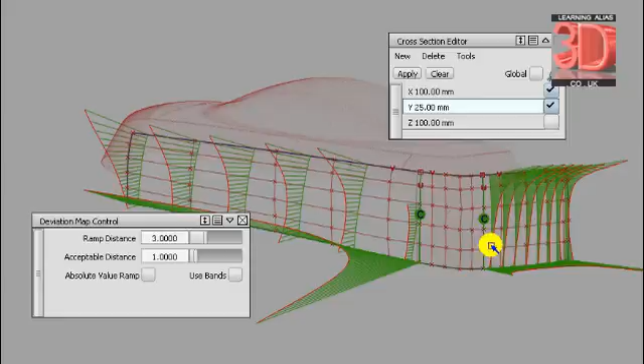We want to get this blend here looking very neat and being very close to the mesh, but the blend has to come after these surfaces 1 and 2, which are the parent surfaces. And as you can see, I've used a cross-section editor to find out what's happening all the way along this surface, and also I use a comb along here to show me what's happening to the surface.

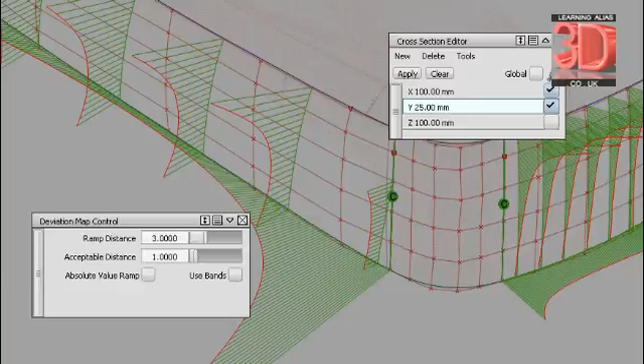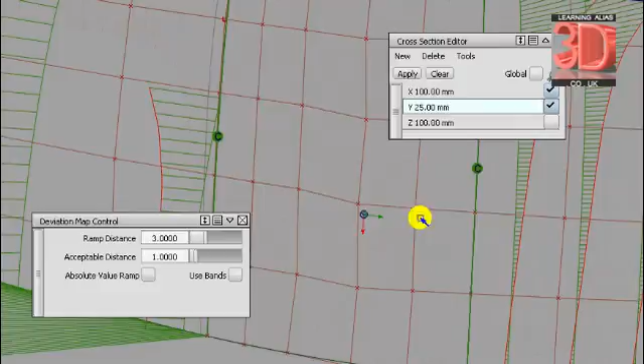Okay, now I've changed this surface to degree 5 so it matches the surface here, and that gives you a smoother flow in your hull around the blend eventually. Okay, there's a little bit of tidying up to be done along there.

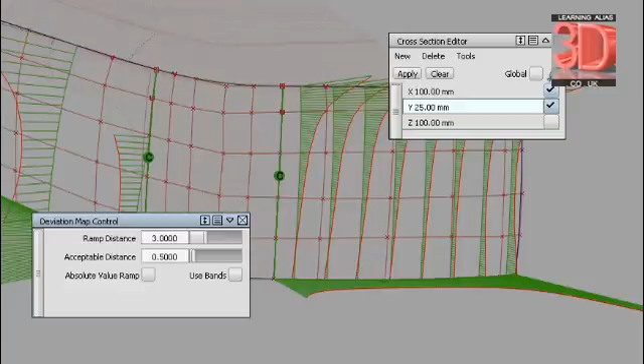Now, okay, let's do some evaluation. I'm not going to work to 1, I'm going to work to 0.5, and let's just have a look at what's going on there. And you can see that we're all looking good at 0.5 mesh tolerance. Okay, there's a little detail to sort out there, but generally speaking we're looking good. Okay,

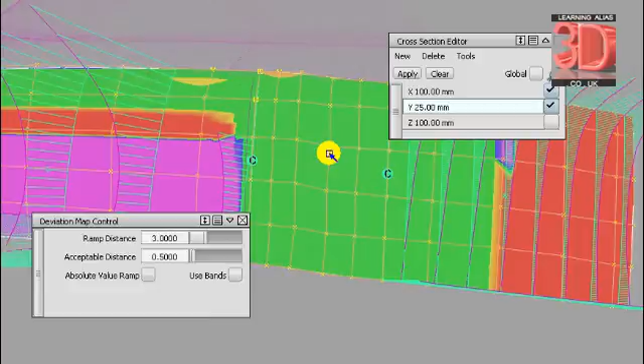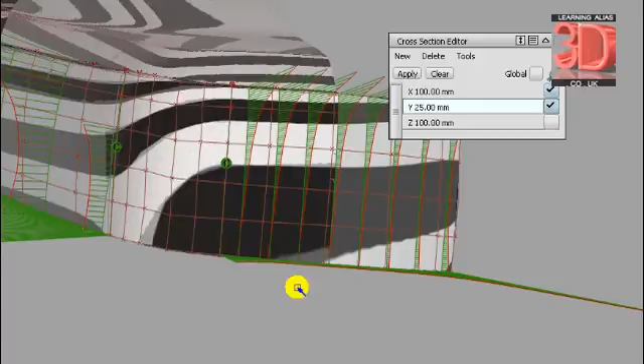next thing I want to do is take off the deviation map and put on the zebras with some transparency, and you'll see that this surface matches the zebra stripes on the STL mesh, and okay, there's a little bit of fine tweaking to do here, but generally it's very close. When you get it matching like that,

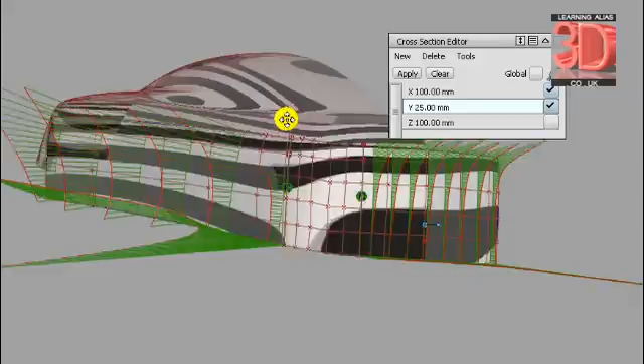it's within 0.5 of a millimeter, and the same along here. It matches the zebra stripe on the .stl mesh. Okay, now let's show you a few things that helped me when I was modeling it, and will help you.

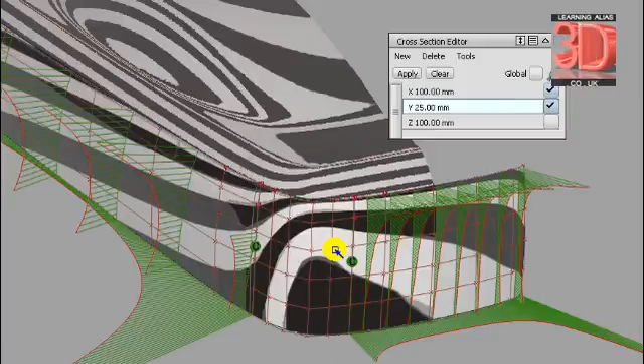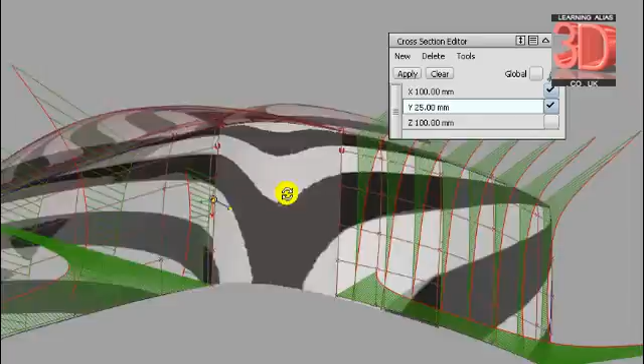So it's very important to get these edges on the parent surfaces straight. I'm just going to pick that surface there, and I'm going to hit I on my keyboard, which is invisible. Okay, and I planarized those. So Planarize Hull tool, here it is, and what you do is you put a point of interest there, you turn it like that so that it's in view like it's in one straight line, and you click it.

Okay, and you can go over to your controls over here, and I'm going to have to move that, and you pick this one and you can swing it around.

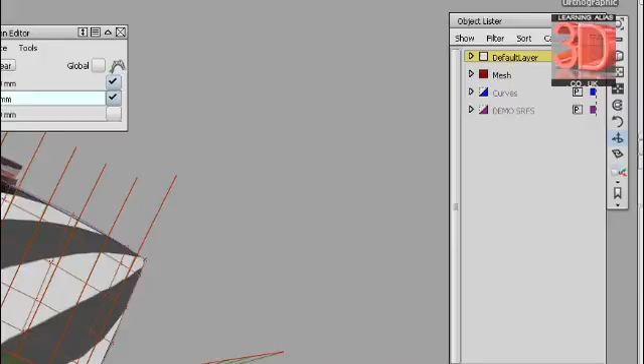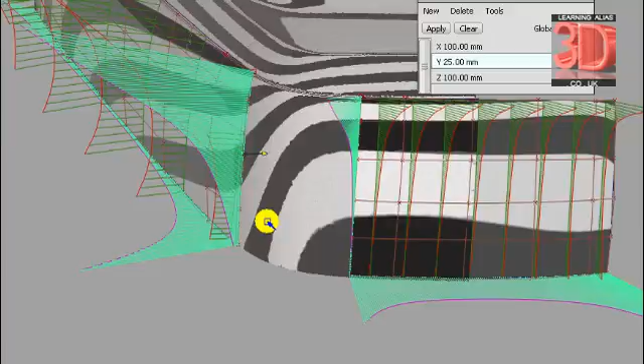Okay, next thing to do is put a comb on this edge and this edge. Make sure that they're not skew when you view them like that or like that, and that they have the same character. You see, this is fairly flat here and then it accelerates in there, and you want it to be doing the same around there, otherwise your blend is just not going to work. The hull on the blend is just going to be an absolute mess.

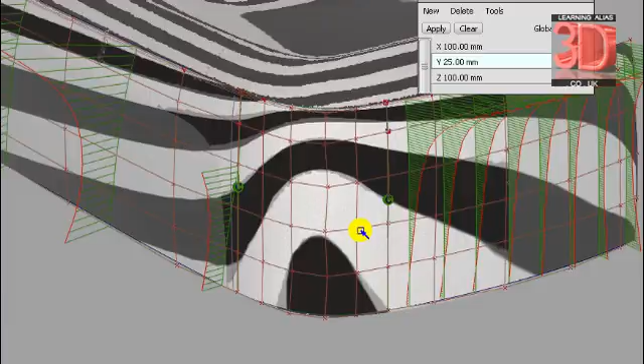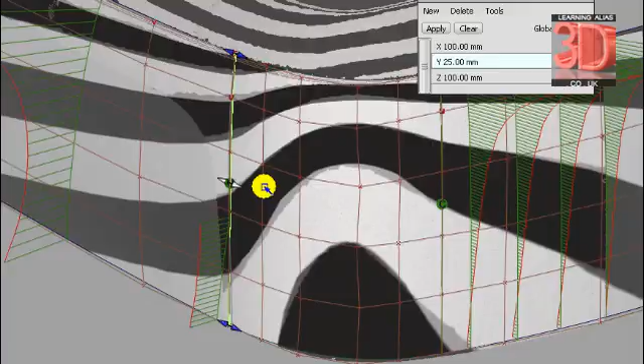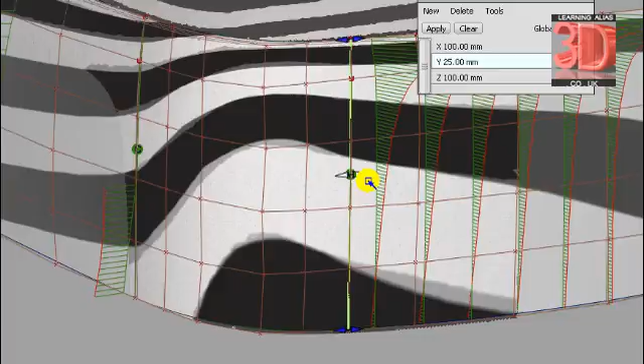It must be over this part of the mesh here. You know, it's no good having it over there. It's got to be just over the mesh here. Okay, so that you can see the deviation map there, and of course you can move that side equally. Okay, let's turn it off. Let's put the deviation map on.

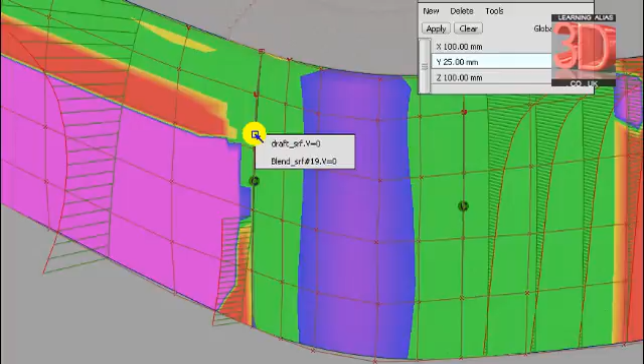Okay, and you can see I've lost my mesh tolerance there, which is 0.5 I'm working to. So I'm going to take extend again, and I'm going to get this parent surface here, the draft surface, and with this it has to be white, this middle arrow, and you can move that around to reduce there. Okay, and I'm going to do a little bit with this one.

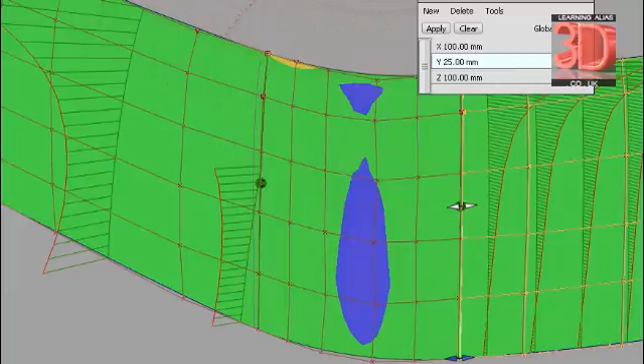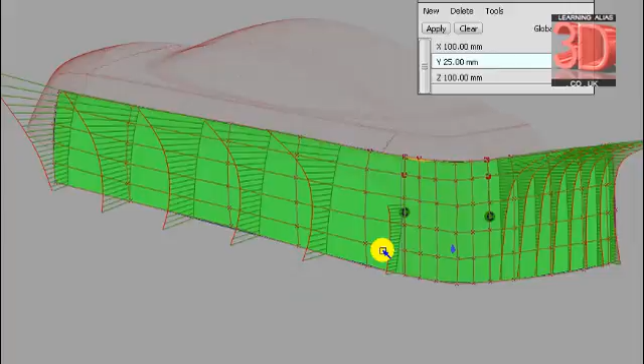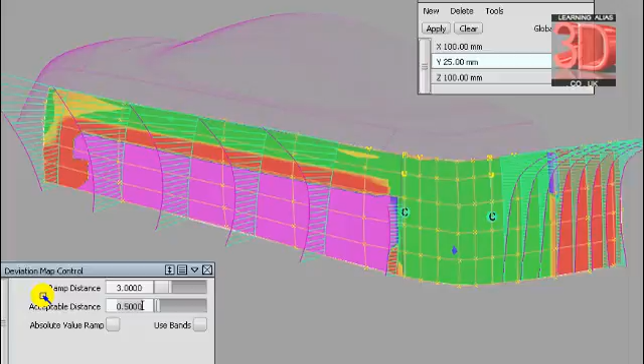Okay, the last little bit you can do by moving a CV or two. So there you are, there's some tips on how to get closer to the mesh. There, we'll do a final check with our deviation map. See, it's still set to 0.5 millimeter. And it's fine. Few areas that need tweaking. When you go back to 1 millimeter, you'll see that it looks much better. Okay, so I hope that helps you to get closer to the mesh.

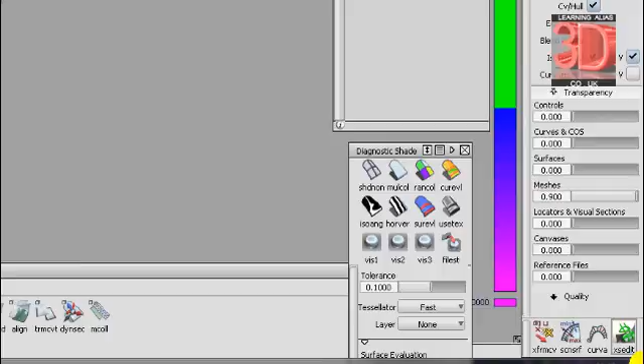And just before I go, I just want to point out that to put these cross sections on, you have to go down here, get this tool here, cross section editor, and that opens up this, and then these ones are along the x-axis, these cross sections. So for those, I'd click on there, and that opens up this control, and then these are the samples here, so I can change how many samples I have, and they're 100 apart. I could change that to 25, for example.

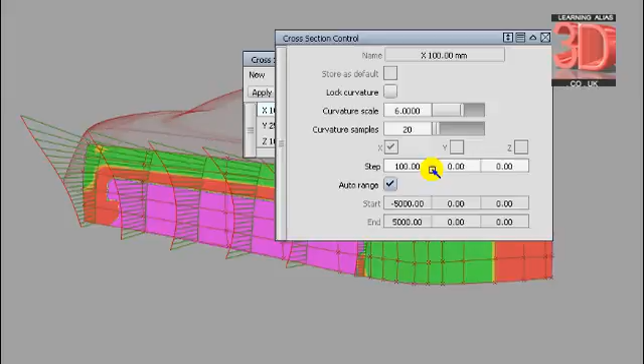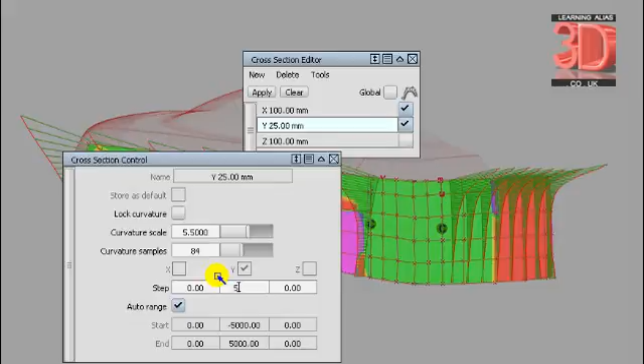If I go to the back of the car, I'm going to pick a surface. Okay, and I want to be on the y-axis, and you'll see there that I have every 25, and if I change it to 50, you see I get less samples.

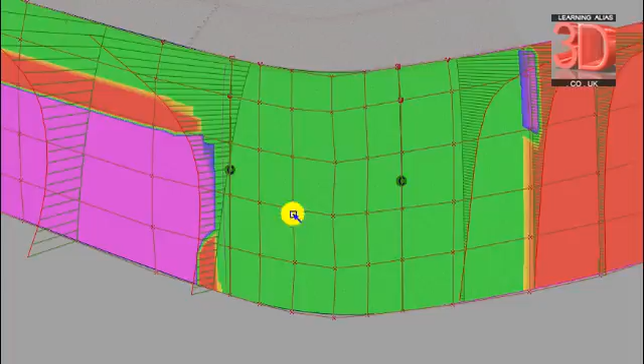Now the best way to tidy up this is to kill the direct history and use the Planarize Hull tool. If you've got little tiny movements you want to make with CVs, you can use the slide CV tool. So you come over here, you get xfrmcv, and you pick CV, pick slide, and you want a sensitivity of about 18, something like that will do, and you click it there, and you can slide those CVs around to tidy up your hull. Okay, and check for curvature when you're finished.